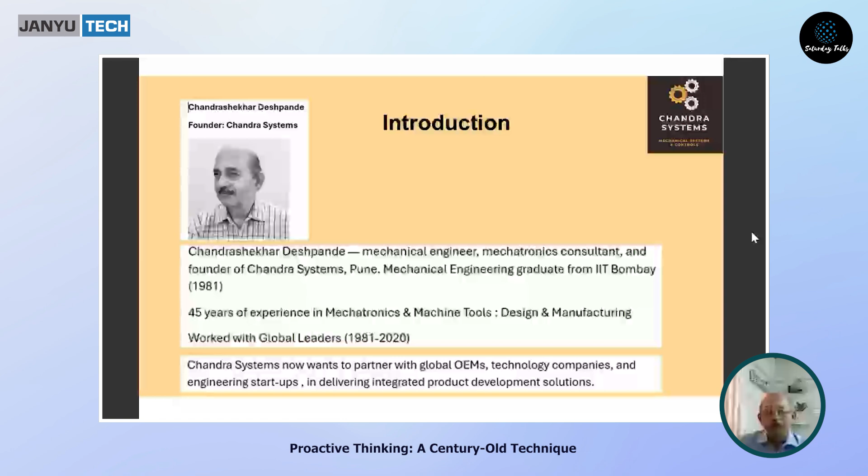Now at present I'm working as Chandra Systems, founder of this small company, basically working with global companies. There are certain export order design and manufacturing, and we now aim to partner with global OEM leaders and technology companies in the coming future. So basically we have an integrated product development solution, right from concept to solutions to CAD models to manufacturing plans, testing plans, and even assembly plans, with manufacturing support service.

Now the case, we'll study it a bit in detail, I would say in technical terms as well as common sense terms. Exactly one week before, on 5th and 6th July, we had a flash flood. I'm staying at Talegaon. We have two hills adjacent to us, and because of heavy rain, there was a flash flood like situation in our society.

The arrow shows basically that is a road, a circular one, and on the top right side there is another premise, a school, and there was a lot of flood coming from the school area and other areas. In short, we had a flood in our society and the entire road was blocked, and it affected two things.

One is the lift broke down, it was not available for 2 days, and then our water supply system, even the drinking water supply system, was not working because the underground water tanks were flooded with muddy water.

Okay, so this was the situation. Now, I would say there are three aspects or features of this. One is, was there any prevention possible? Was there any risk mitigation possible? And what was the level of communication?

In this case, basically, for communication there has to be a hazard communication system, and for preventive action this should not happen. One is, we have to have an effective drainage system. Then we have to have protective walls, which were missing actually, meaning it had been damaged 2 years before and was not repaired at all.

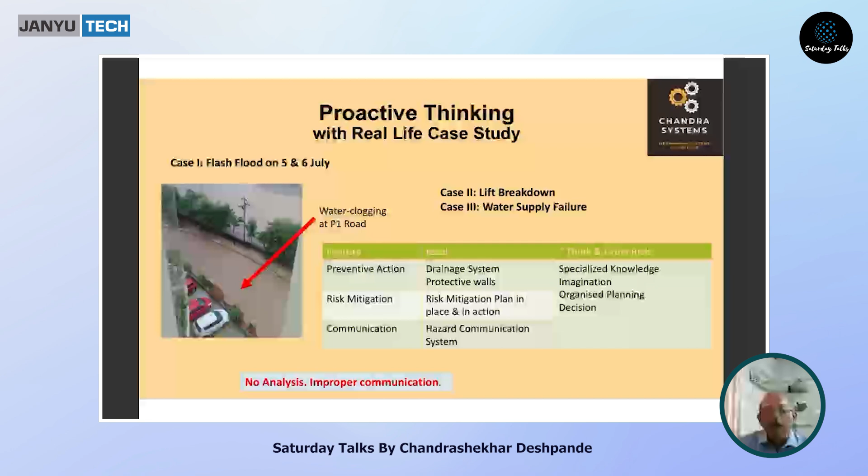So what happened? There was chaos. There was almost like a warlike situation in our society, and everybody was confused. Entire life was upset for 2 days, actually, I would say.

Now, what does that 'Think and Grow Rich' philosophy say? These topics will come in subsequent slides. One is specialized knowledge, meaning you have to know how damage will take place, what is the risk mitigation plan, what are the communications required. Then you have to imagine, you have to visualize what may happen.

And then most importantly, you have to have an organized plan, and then somebody has to take the decision. So basically what happened? There was no analysis, there was improper communication, there was no documentation, there was no planning, because of which this situation came up.

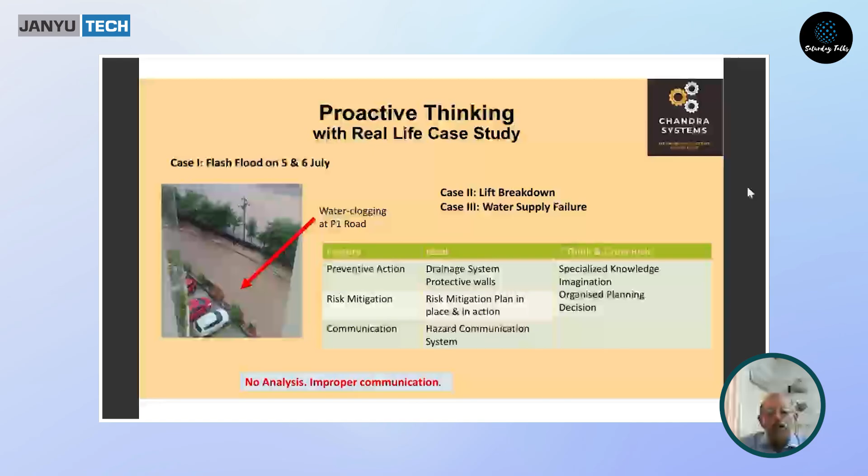Okay, now this was overall a simple management situation which we see everywhere, a common life situation. Now we'll go a bit into mechatronics, that is case number 2, lift breakdown. Here this is a simple manual sketch, I would say a simple schematic, of a lift system.

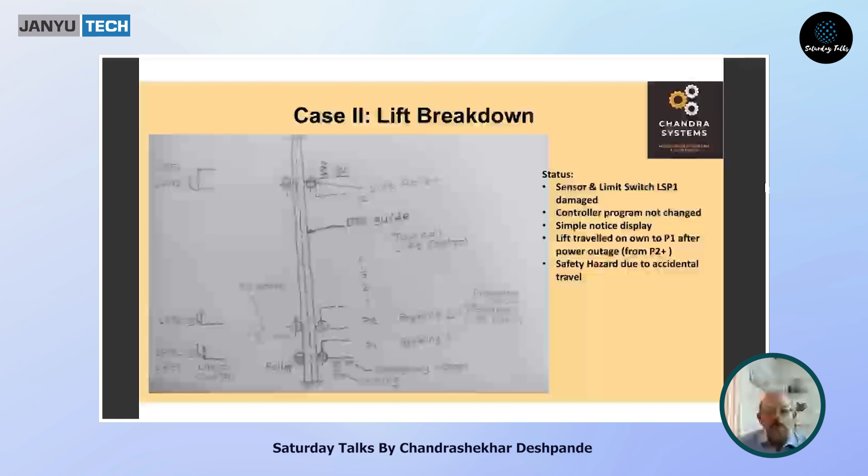What happens, since the lift starts from P1, which was flooded, and it goes up to the 12th floor. As you know, the lift is run by rollers on a certain lift guide. There are 4 or 6 numbers of them. Then each floor has a sensor.

In this case, parking 1, that is P1, has sensor LSP1, that limit switch of P1. P2 has limit switch P2, and the stop spring and the emergency stopper at the bottom. So they are at P1. And you see on the upper side, a similar system has to be there.

What was the status? The sensor and limit switch LSP1, that is the bottom sensors, were damaged. Somebody decided that the lift will travel only to P2, not P1. That was also sort of information given, message given. And then there was no proper communication or control system updation, because of which there was subsequently an accident - the lift traveled on its own to P1 when a power outage took place.

The controller program was not changed. Communication was not up to mark. There was only a simple notice displayed. So basically there was definitely a safety hazard.

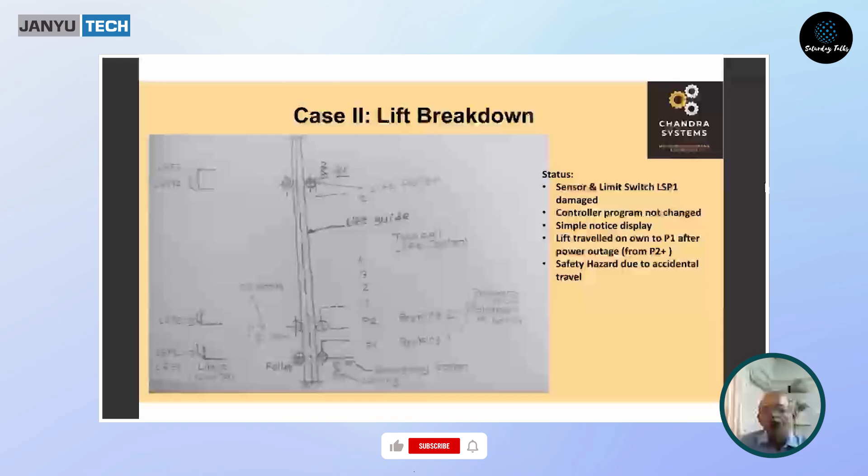But the program change did not mean that you put a notice saying please do not press the button on P1, the lift will come from P2. Okay, and what happened? I will tell the exact time.

So what happened? Number one, the controller was not changed. The communication was not sent. And most importantly, the entire mechanism and control system was in a dangerous situation - it was not supposed to go to P1, but there was no stopper.

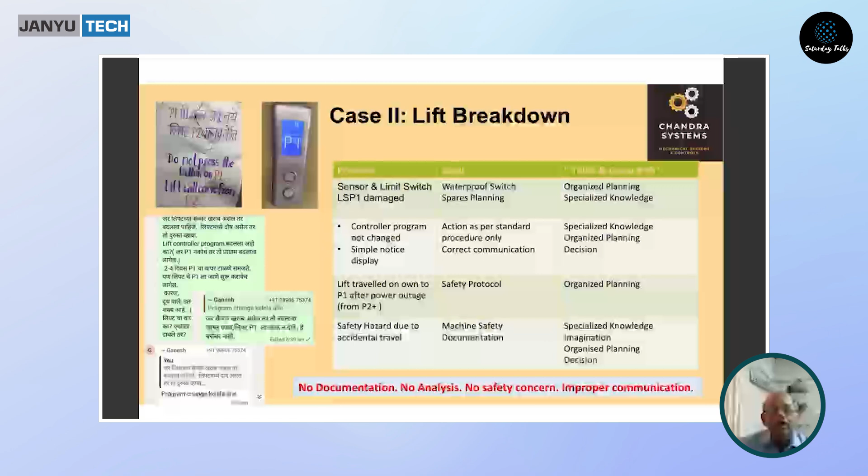See, if I want to stop somewhere, there has to be a limit switch and there has to be a mechanical stopper or spring to absorb the energy. But that was at P1. For P2, if you want to stop at P2, you have to have that arrangement over there, which cannot be done. So under any condition, you have to have correct sensor and control setting.

So now the problems are: sensor and limit switch damaged. Ideally the switch should be waterproof - for example, you can have a proximity switch, which is a waterproof switch, instead of a regular limit switch. Then the spares were not planned, so there was delay in lift repair.

So what the book says is you have to have a completely organized plan and specialized knowledge. You have to know how the circuit works, what parts are available. Next is there was a simple notice and the controller program was not changed. So what happened, because of which at a voltage spike, the lift went directly to P1 when there was nobody inside the lift.

Now there is another safety concern. If somebody was there in the lift, and without any notice, without his command, the lift went to P1, there could have been an accident or even an injury to a person.

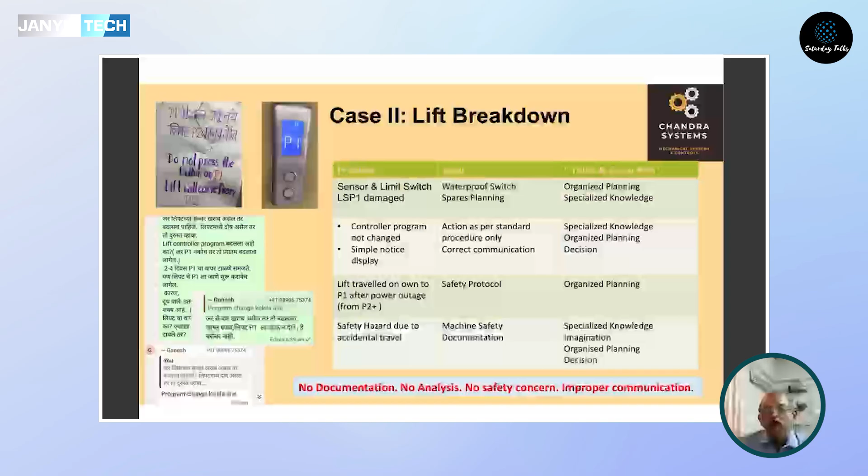This point was missed during all this communication. So what happens is, for controls or in a lift mechanism where machine is involved, human life is involved, you have to have a complete plan, correct decision, and specialized knowledge. I told you about the safety protocol which was bypassed. You have to have a complete organized plan for that, and safety hazard due to accidental travel was one of the problems. We have to have proper documentation, machine safety documentation.

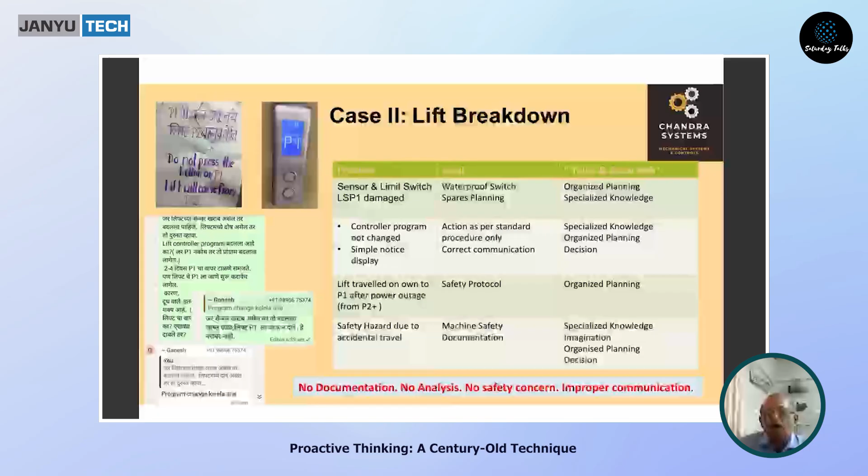This documentation never existed. So what the standard practice says is, you have to have specialized knowledge, you have to imagine what will happen, you have to have an organized plan, and there were no safety concerns and improper communication.

Now just think for a while, this is a common mechatronics control system of any mechanism. See if you have witnessed this sort of situation elsewhere in your previous life experience, or even at a railway station, do you see a situation like that? Because I confirm the observation that with the power outage, the lift traveled on its own.

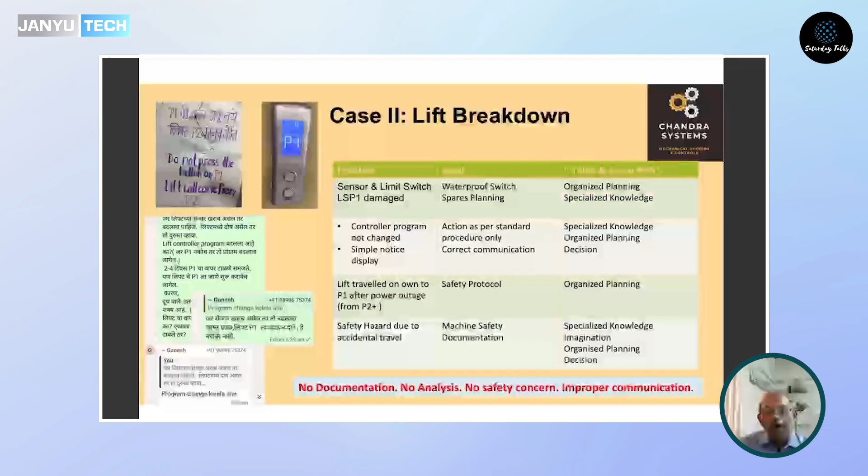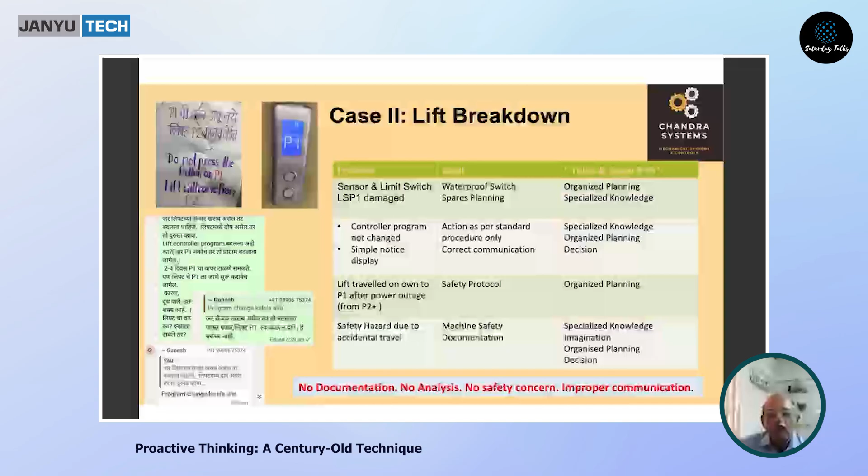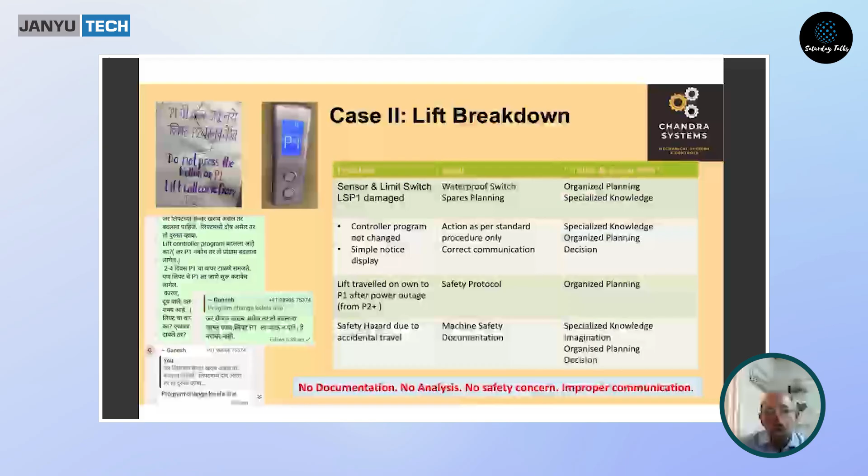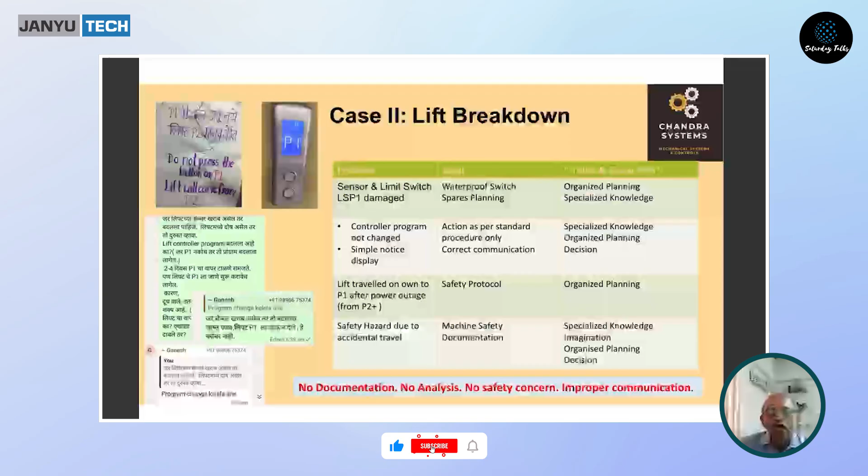I would say around 1995, about 30 years ago, we were making a CNC machining center. It was a column and there was some tuning going on. It was not complete, and then there was a power outage. Power started again, and it was May, and there was lightning. There was a voltage spike. Because of that lightning, there was an error, and the entire column on its own moved against the stopper because of certain programming, that is referencing or zeroing, as it is called in the control system. So we have to know all these things beforehand and in totality.

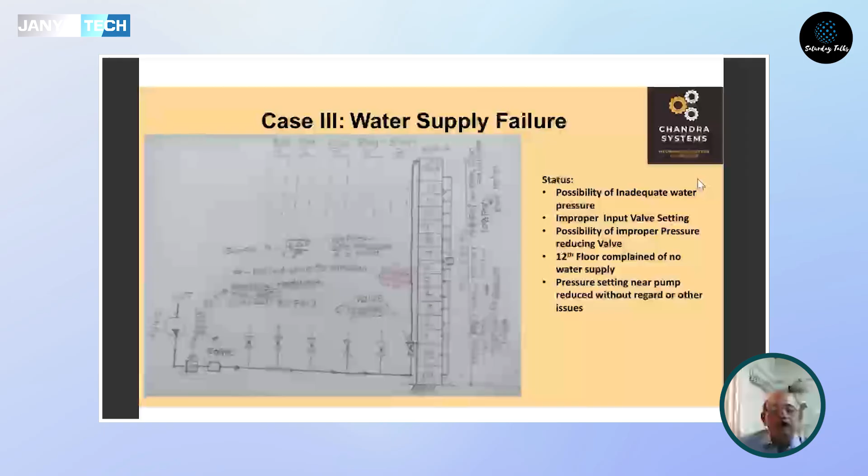So we go to the next problem, which is very common: water supply failure. It is slightly blurred and slightly complex, so I'll briefly explain. On the left side, you see a pump, then a pressure adjustment valve, then a joint, and after that pipelines going out. We have 6 buildings, and ours is the last, building A. There are halls going to each building, and to our building there is P1, parking 1, P2, parking 2, 12 floors, and then an overhead tank. The water goes via the valve, which is half open as shown, to the overhead tank, and then through another opening to all flats, with a pressure reducing valve in between.

Now what was the status? There was a complaint that water is inadequate at floor number 12, and in any case there was a water supply problem. So there was a possibility of inadequate pressure. I'll tell you why: there was improper input valve setting, shown here as valve open, and a possibility of improper pressure reducing valve, shown around the 6th and 7th floor. Basically, the 12th floor complained of no water supply despite the supply being on for longer. And the pressure setting near the pump was reduced without regard to any other issues.

Now what happened here? The joint shown on the left side had failed. There was some leakage, so the joint was replaced. It is a simple L joint, and because it is a high pressure line, there was failure. To ensure the joint doesn't rupture again, the pressure setting was changed, and somebody set the pressure around 80 psi. Now, the minimum pressure setting required based on basic calculations is 78 psi. Considering the pressure drop required for good flow, it should be around 100 to 108. So 78 is the bottom line, ideally it should be around 108, and the setting was around 80 or 85. These are approximate figures, but the phenomenon did occur, the exact figures may vary.

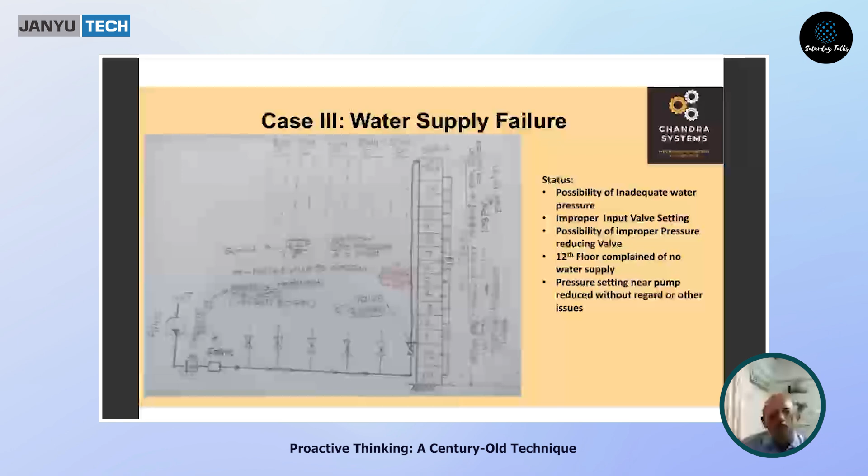So what happened is, the pressure was varying, the joint failed. Because the joint failed, the pressure was reduced, and because the pressure was reduced, the water supply was not up to the mark. And again, somebody had played with the valve, it was kept half open, and the pressure reducing valve was not functioning.

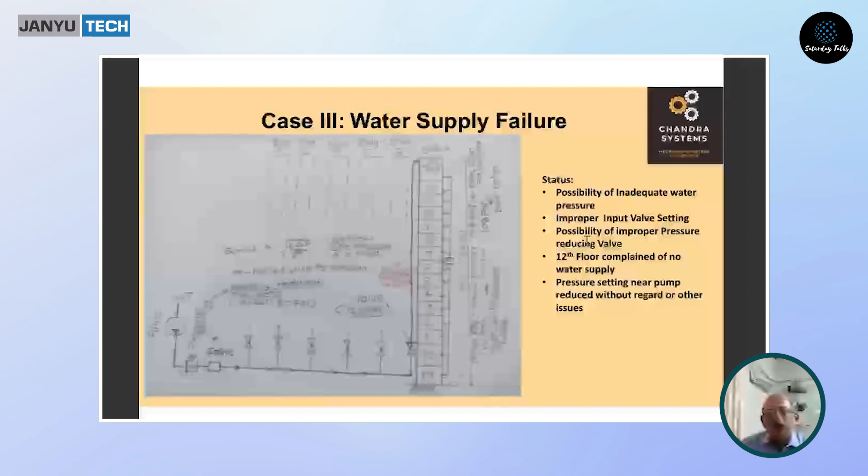Now we see that the problems are inadequate water pressure, improper valve setting, improper reducing valve setting, and then somebody had fiddled with this regulating valve, particularly the valve near the pump. So all these were done in isolation without regard for the systems.

That is why we say that system thinking is important. Now, ideally there should be a standard operating procedure and operation manual with every machine or every system. This is a mandatory thing. It was missing, nobody knew, and people were not literate to the figures or numbers that are required.

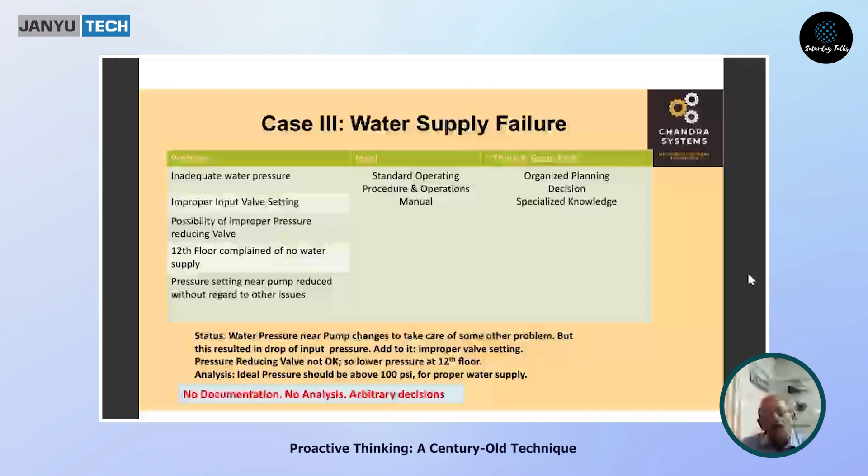Now, what the book or the guidelines say is you have to have organized planning. There has to be a correct decision, and you have to have specialized knowledge. So what we see is there is no documentation, no analysis, and arbitrary decisions.

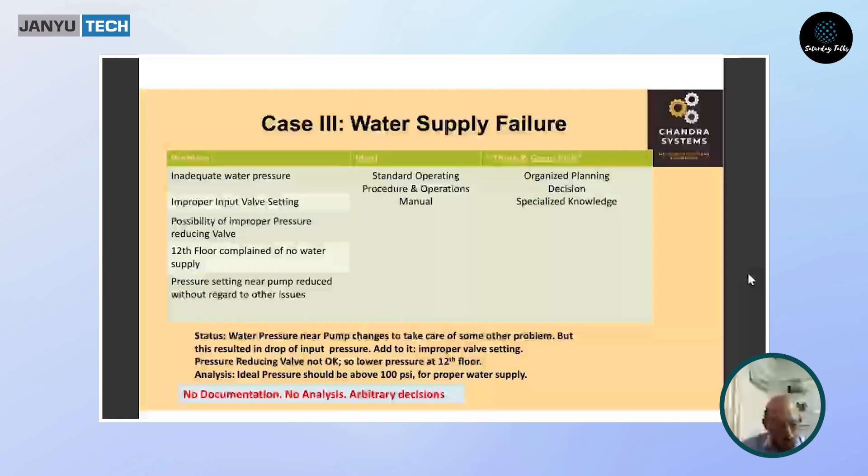In short, we are saying the ideal pressure should have been above 100 for proper water supply, because of basic hydraulics principles. Now we have seen basically simple cases that occur around us. I took very simple and day-to-day life examples so that I can communicate properly the need for a correct system.

What happens is we have a set of proven principles, as Andrew told, that we have the knowledge, but it is not passed on. Now coming to today's time, we know that they are documented, and luckily they are available with proper updates also. Now it is our responsibility that we understand those techniques and start applying them.

Why? Because it is like a vector. The starting point is where we stand today. Our aim is to have good success and appropriate performance at professional life, and we need direction. The beauty is the direction is already given, it is only that implementation is required. That is why I am highlighting and listing the techniques that can take us there.

Now we talk of Think and Grow Rich, which has 13 main principles, but in order to stick to our objective, I am picking only a few of the principles. On the left side we have the name of the principle as per the book, then the application of the principle, and to the side what will happen at work or in the field. First, desire.

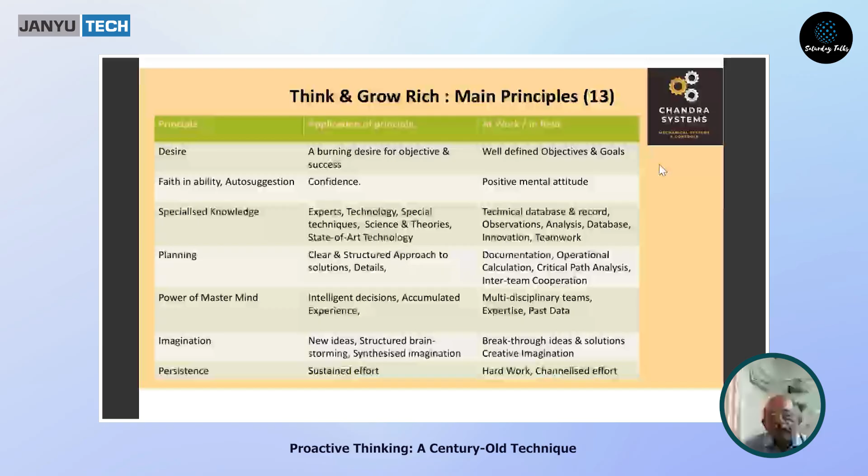Then there is one thing called synthesized imagination. That is how to generate ideas, something like brainstorming. There is a process for that, illustrated in the book. Its practical implication is that there are breakthrough ideas and solutions we have to arrive at. And then creative imagination is what is important.

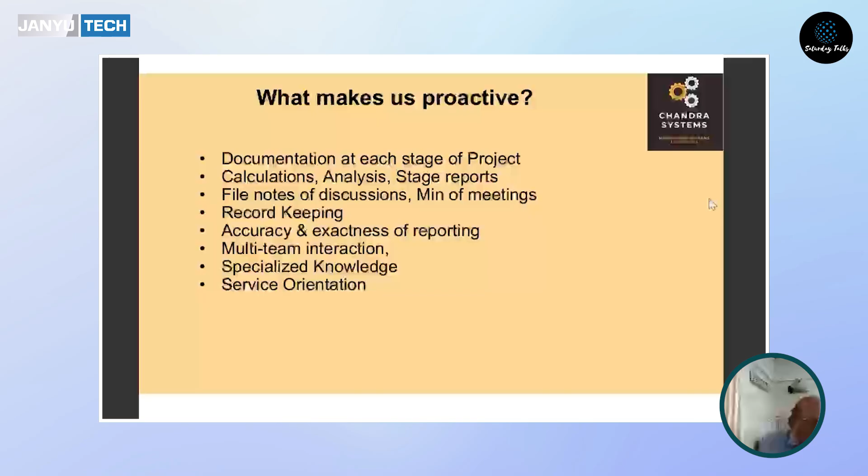Here we have seen the various steps as per the book. We started with our problem statement and then studied these age-proven principles, and then we're talking about being proactive. I'll take more time on what makes us proactive.

So then you have to have evaluation, then a proposal, then design, initial concept, then solid modeling. Solid modeling, if put properly, is itself documentation. The storage in archives, storing of the latest model, and communicating to everybody at the correct stage, then manufacturing drawing - that itself is documentation.

Then there has to be a manufacturing plan, an inspection plan, a test plan. So all these plans are basically planning, and documentation goes together hand in hand. This is very vital.

Then comes calculations, analysis, and stage reports. We have to have stage reviews or periodical reviews, and all analysis has to be done at the right time. Because if a part is going to fail, we have to know it before it is finally designed, or if a mechanism is not adequate, we have to know beforehand.

Then as we go ahead during the projects, there are discussions. What happens many times is there are no file notes of discussions or minutes of meetings. Even if a decision is taken by somebody, he has to have a file note of it if there is no meeting. That again is record keeping and documentation - putting up everything with proper folder structure. In old times, it had to be project files.

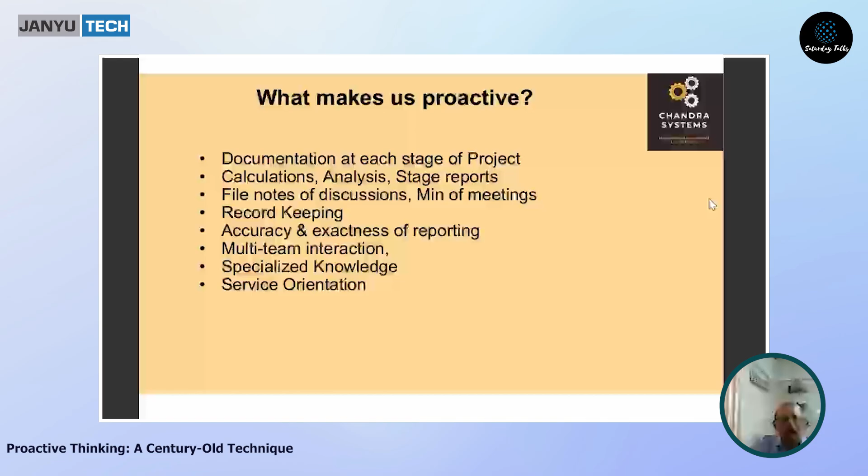And then multi-team interaction. In your projects there will be a hydraulics team, an assembly team, a controls team, manufacturing team, designer, vendors. So there has to be proper interaction and communication, for timely completion and more importantly safe and excellent completion of the project.

Now the point comes to specialized knowledge. Specialized knowledge is very much important. This is being proactive - if you are proactive, you will on your own go and learn about various techniques, various methods. What is the state of our technology? What is the way in which I can improve my work? How can I improve my design? What are my competitors doing? So all specialized knowledge, I would say, in today's era of improving technology and AI, this is what is important.

The person who has the latest knowledge has a better chance of survival, but he can survive even better if he has proper documentation, proper analysis, and teamwork. Because if specialized knowledge is not associated with proper documentation or proper analysis, it is not going to succeed.

And over and above that, service orientation—you have to be customer centric. So all the departments, right from proposal, initial concept, modeling, manufacturing, everywhere we have to have service orientation. Service orientation meaning, are we anticipating our customers' working? For example, I may have the manufacturer or owner of the company as one customer, and also the machine operator or mechatronics equipment user as another customer. So am I giving proper service? Am I oriented to service for all of my customers?